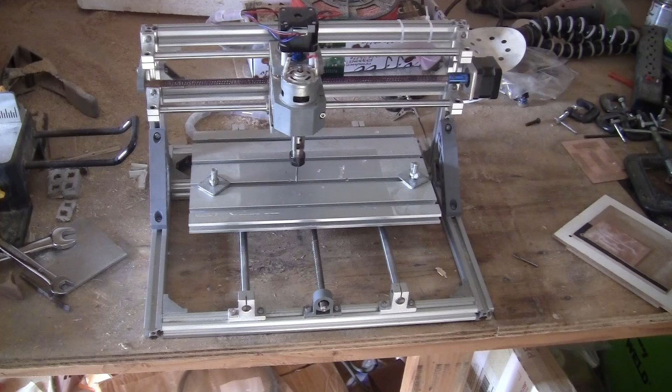Okay guys, so if you just bought one of these 3018 CNC machines, or you want to buy one and are not sure how to start milling with it, I'm going to make a simple step by step guide to show you how to start making something with this CNC machine.

So the first step is to install the driver for the control board of the machine. This machine is the Chinese knockoff of the Arduino chip, so you just need to search for CH340 driver, and click on the first link, CH340 drivers for Windows, Mac and Linux.

Click on it, go down, and download for Windows. Click on it, save, and open. Unzip this and click on install. Here you just click on install if you haven't installed it. I already did, so I'm going to skip this step.

Next step, what you need to do is install a software so you can communicate with the machine, talk to it, make it move, and start milling by sending the G code. So you type in Candle GRBL.

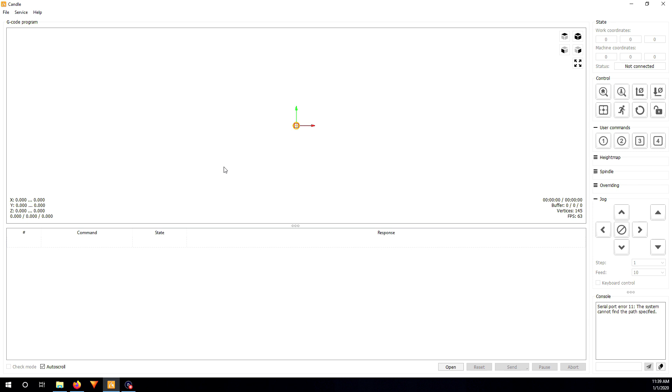Here's the interface of the software. Go to service settings and choose the port of the machine, so it's COM6, and click OK. As you can see here, it reads the GRBL version of the machine, and that's it. If you click on the dollar sign here in the comments, you should see all the parameters of the machine.

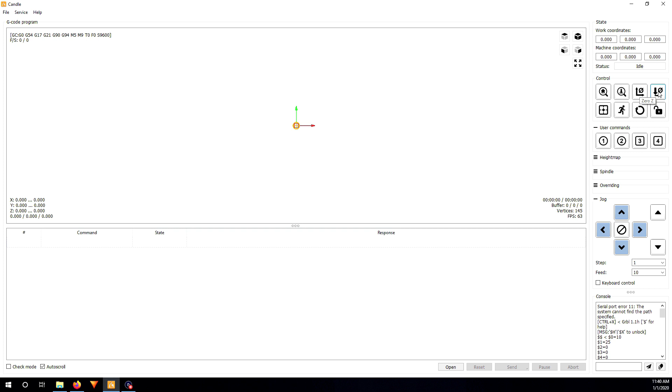So now what you can do here is use these buttons to move in X and Y, and these buttons to move in the Z axis. These are to zero in X and Y, and this is to zero in the Z axis.

Next step, you will need to create a G code file so the machine can use that and run and make something. So what I'm going to use here is the free version of Fusion 360.

So just type in Fusion 360 free, and here you can see there's a link for Fusion 360 for free personal use. Just click on that. In here you can sign in, create an account, and download the software and install it.

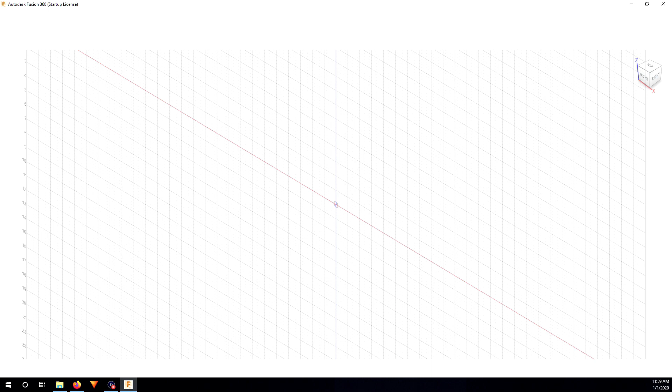I already did it, so I'm just going to go here and type in Fusion 360 to open it. Once you install Fusion 360, you just open it, sign in, and create a license. So here I have a startup license.

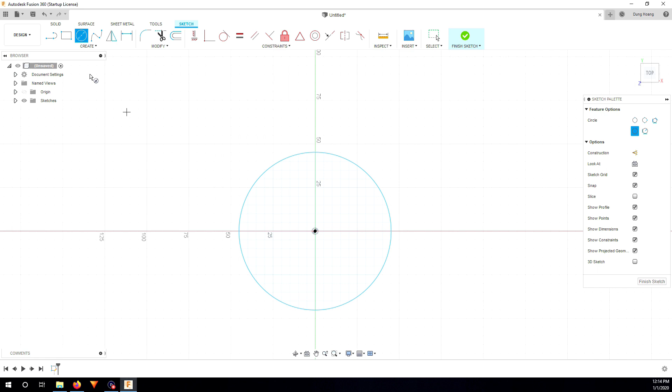So I click on Sketch to create a new sketch here, and I'm going to create something simple to show you the example. So I'm going to create a circle. For the size, I'll probably choose like 50 millimeters.

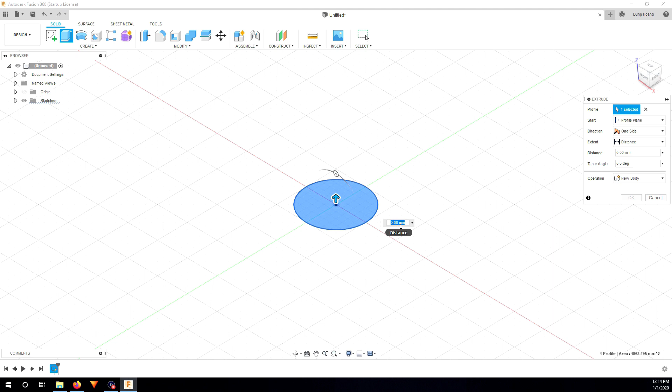Finish sketch, and go to extrude, and do about 12 millimeters, because I have a piece of plywood that's 12 millimeters thick, so that would be very easy to operate. So I create 12.

So here I'm going to round the edge. I click on fillet here and make the diameter 10, 12, or whatever - 10 is fine.

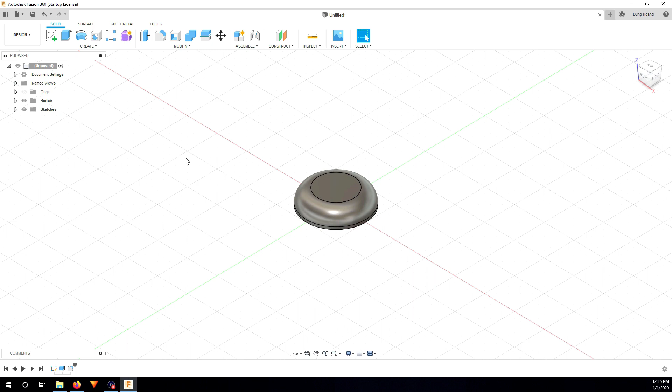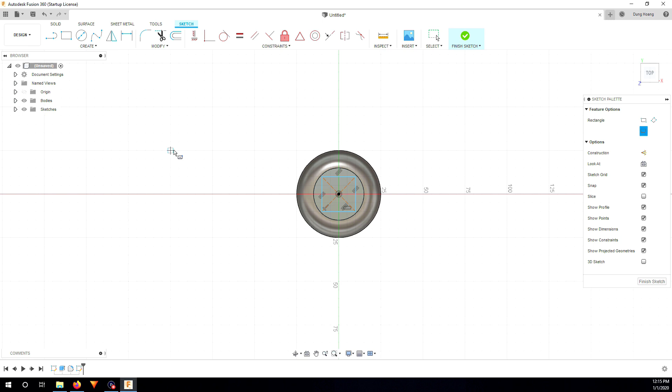And then what I'm going to do is create a square in the middle, just cut in, so just to show you the example. I click on this surface and draw a rectangle, but I'm going to do it from the center, so it will start here and make a rectangle probably like this, and I finish the sketch.

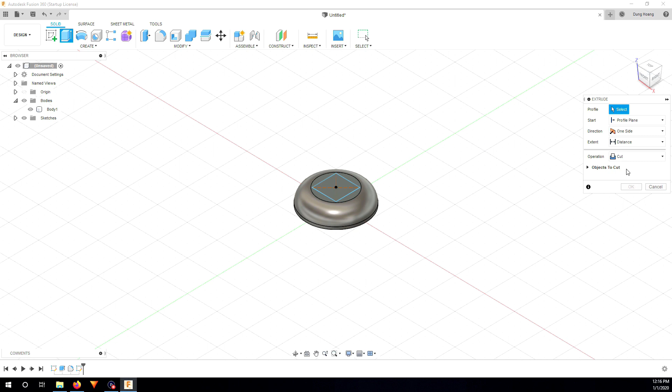Then, because I'm going to cut this profile into this body, I go to body and choose body 1, and go to extrude, and here I'm going to do a cut, and the object to cut will be this profile, and it should go down this way, and I'm going to do 5mm like this.

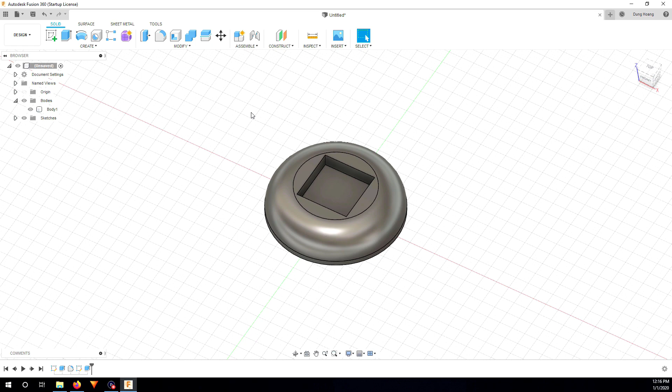And here I have a square in the middle, but as you can see, the corner is like 90 degrees, which I cannot do because the bit is round. I have a 3mm bit, so I'm going to fillet this a bit. I click on fillet here and choose all 4 corners.

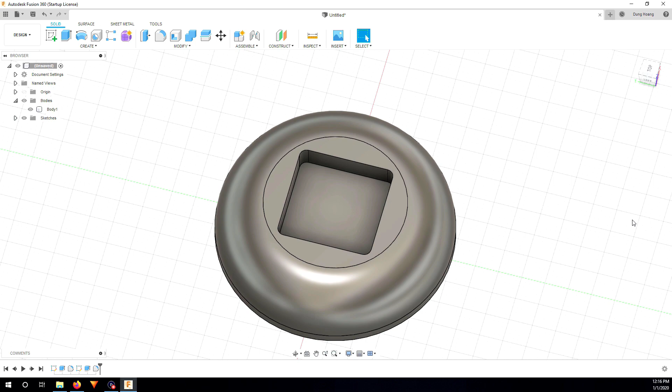And I'm going to put 1.5mm. Here you go, that's it. So now I have a very simple shape here. From here you can design anything you want, but I'm just going to make a simple example to show you quickly.

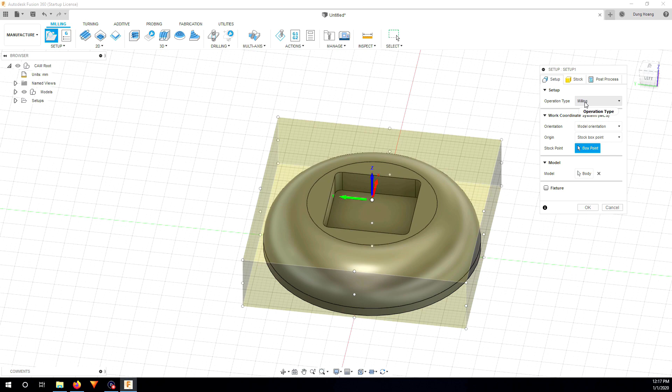Now to the CAM part, I just click on this button and go to manufacture, and click on setup. Here, operation type, just click on milling, and what I choose is the corner, and you can see here the arrow is X goes this way, Y goes this way, and Z goes this way. So I usually choose this corner to start, and for stock I'm going to put the offset on the side at 5mm.

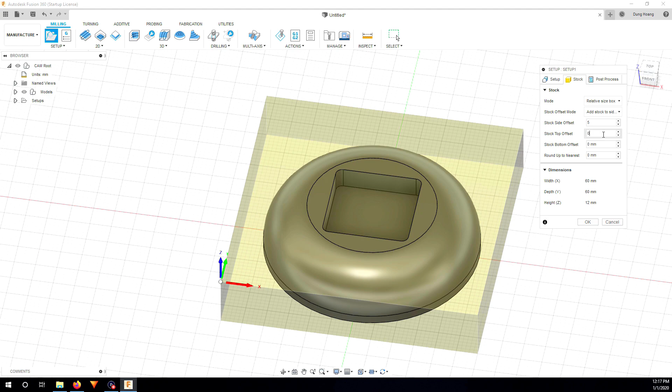And then top offset I put 0. So now I'm just going to do right on top here. So I click OK, that's it.

Next step, you have to create the tool. So you click on this tool library. This tool library, you just create the tool once, and it will save the tool in your account here. So next time if you reinstall the software, you still have your tool library online. So to create a tool, just click on this symbol.

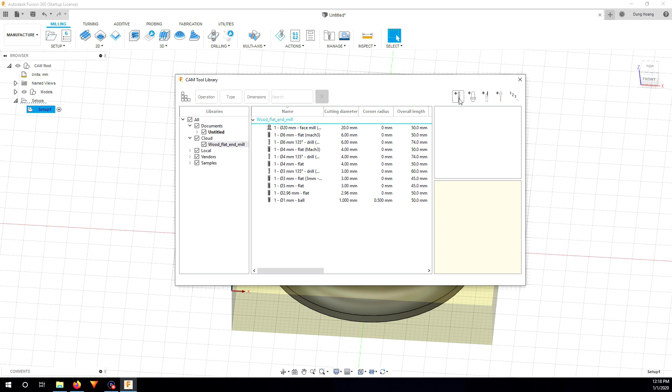Create a new tool here, and well, I usually like to make it run really fast for the spindle, so I put like 10,000 RPM. And cutting feed rate, I probably go a bit slow because this machine is not really powerful, 750mm per minute, that's fine. Lead in, lead out, ramp feed rate, I'm going to go with the recommended settings, so that will be fine.

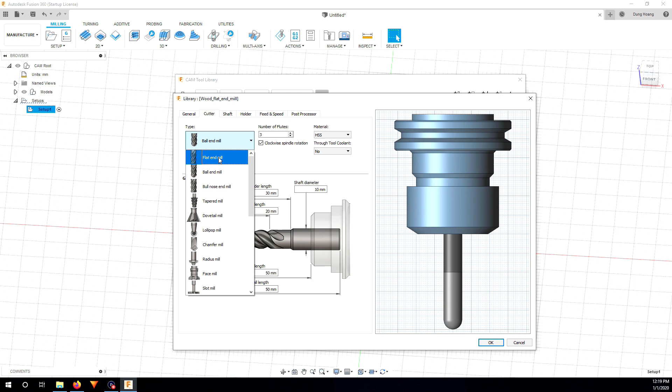Now for the cutter, well, you choose the type that you have. I have a flat end mill, so I'm going to choose flat end mill, and I have 2 flutes, in millimeters, that's what I use.

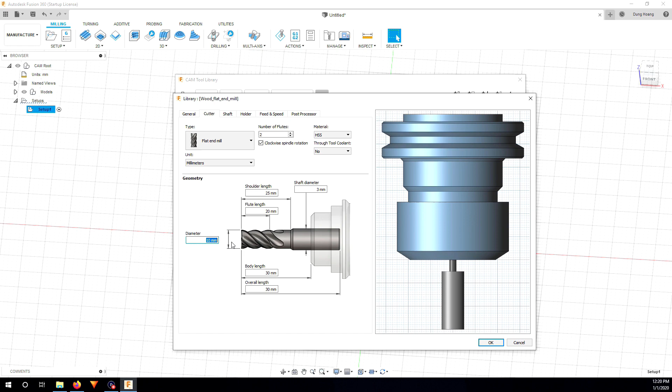So here you just enter all the parameters of your bit, whatever you buy. So I have overall length of about 50, body length probably let's say 30, and then I have shaft diameter only 3mm. Shoulder length, here you can put like 25, and here is 20. This is what I have on my bit, so here I put 3. Here you go, I'm done with this.

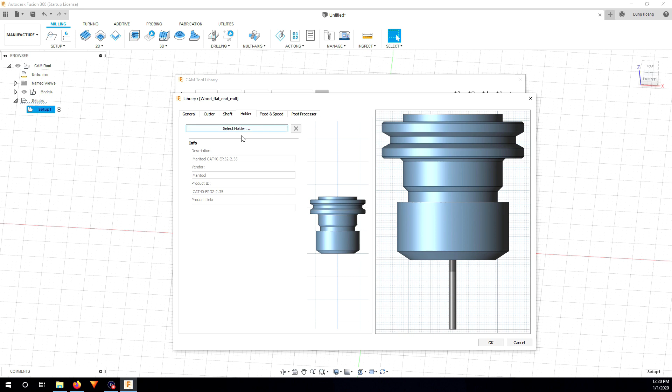General, you can put a name on this. You're going to put like 3 millimeter flat end mill, or anything. So what else? Shaft, I don't need shaft. So here I'm going to put holder.

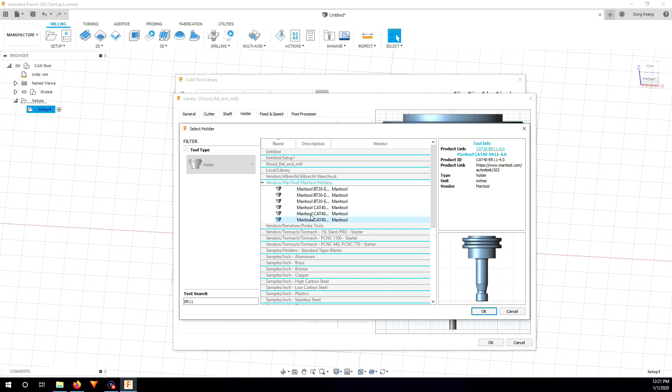So I have the ER11, and it's pretty short, I think. So I just choose like ER11, probably, well, whatever is similar to what you have. I think it's about like this.

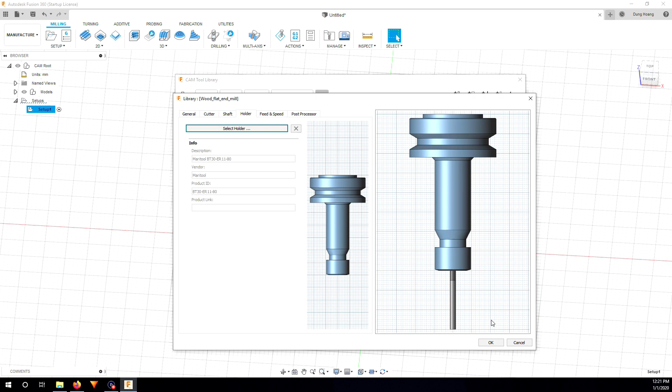So I just click OK. The holder shape doesn't really matter here in this machine because it only goes straight down and it doesn't have much space, so just the cutter by itself is fine. So you just click OK. So here you have the bit just created, so you can close it. Okay, so now you've created the tool.

First step, I'm just going to machine out this pocket. So I just go to 3D pocket clearing, and I choose the tool you just created. So here, and click OK. So here you have all the parameters of the tool, and you can change it here.

If you change it here, it only affects this cutting operation. It doesn't really affect the settings of the tool in the library. Next time if you open it, you still have the same parameters that you set earlier.

So here I just disable this, and I go to here, and I'm going to choose selection, and choose this boundary. Remember to choose this bottom boundary, not this one, because if you choose this one, it's not going to cut anything. So this one, and tool center is inside the boundary, and well, that's it for this.

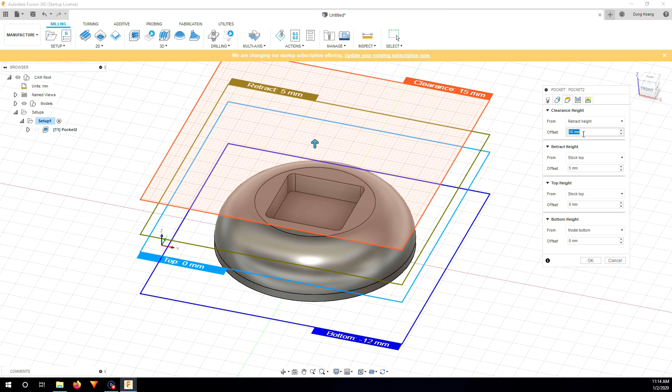And here I'm going to reduce this to 4, 2, and nothing here, because these are small numbers, since your machine doesn't have much range in the z-axis. And here I'm going to put like 0, and just reduce this number to whatever the machine is capable of. For me, 1 millimeter probably fine, so I just keep it at 1.

So I do 5 passes for this 5 millimeter thickness, and this I deactivate. You can leave some stock here and do one last pass to kind of smoothen the wall, but for me this is fine, so I just deactivate this.

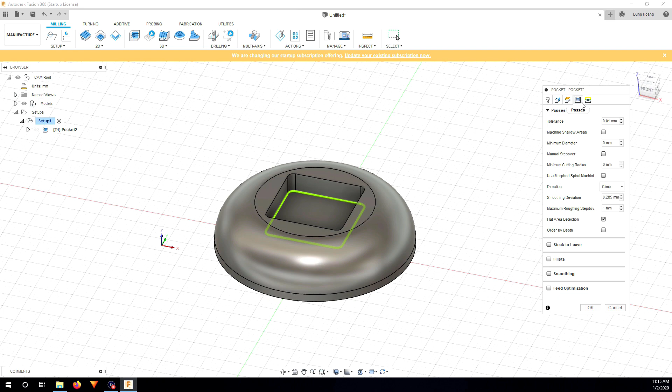And for this I'm going to choose the shortest path so it goes faster, and here I'm just going to increase the number a little bit, the angle for the ramp, so it goes a bit faster. And that's it, I just click OK.

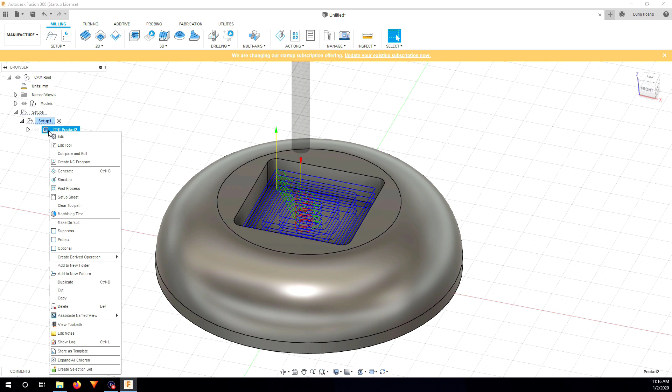Okay, so here the blue lines are the path that the bit is going to move. So you're going to cut along this blue line, and now you can just do the simulation to see how it looks. So just simulate, and here for tools, click on transparent so you can look through the tool. You can deactivate this, or you can choose to leave it, just to visualize it. So for stock, you want to see it, and you can also make it transparent or not. And here I definitely want to go a bit faster, so I can see how it cuts.

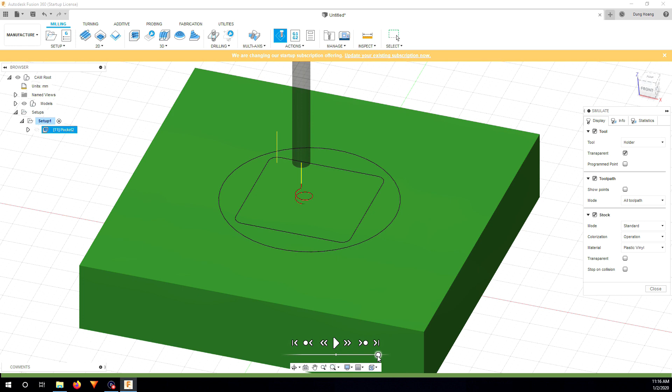Okay, so this looks correct to me. So I'll just close this and go to the next operation, just to mill out this fillet.

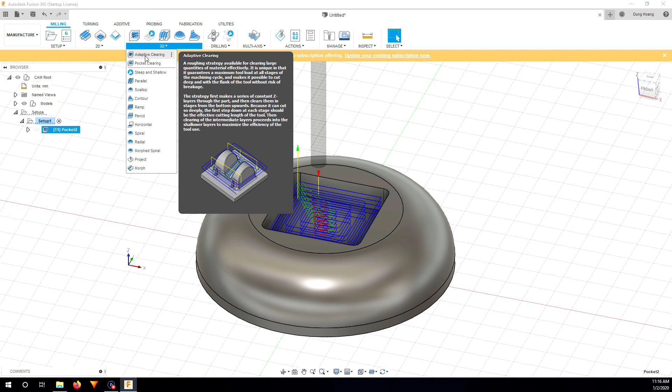So I'm going to do adaptive clearing in 3D. I'm just going to choose the same tool here, and I'm not going to change this, just to be quick. If you want to do multiple tools, this probably will cut smoother if you use a ball nose, but for me I just use flat end mills, just as one simple example to show you. If you want to do multiple tools, just watch my other videos, I showed how I did it. You can do it other way, but I think just the way I did it also works fine.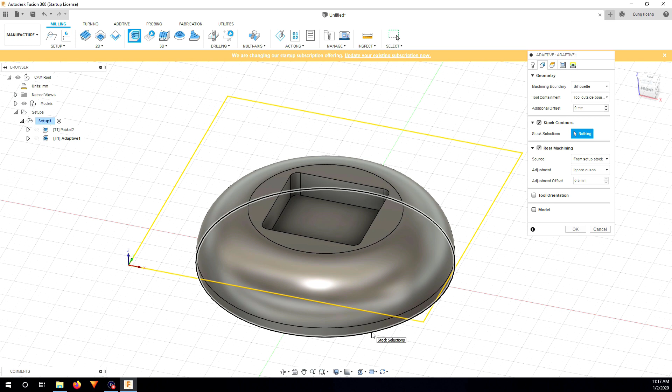So here I just go to machining boundary. I'm going to do silhouette. What this means is you're going to cut along the boundaries, just along this boundary of the piece. So tools will be, well, I can choose inside the boundary and additional offset.

If I leave it 0, it's not going to cut much. I'm just going to leave it 0 for now to show you an example. And I'm going to do rest machining, yes, from the previous operation. So it's not going to cut this part, it only cuts this part because this is already cut from the previous operation.

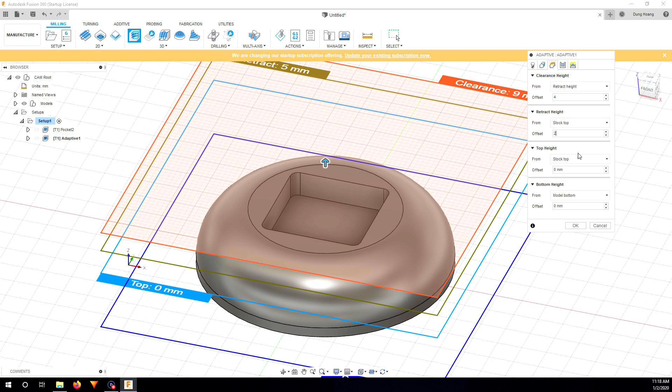So now I'm going to move to this, and I also reduce this to, no, 4, 2, and bottom height. I don't want to cut all the way down here, so I'm going to cut till here, so it's going to be like a 2mm offset. So the bottom height is like 10mm from the top here, so it will be exactly at this line.

Here I do the same, 0.1. Maximum roughing step down, this is very important, so reduce this to 1. And now fine step down. If you want to make it really fine, just follow along this curve, you reduce this. For me, I'm just going to increase this a little bit so it goes a bit faster, 0.2mm.

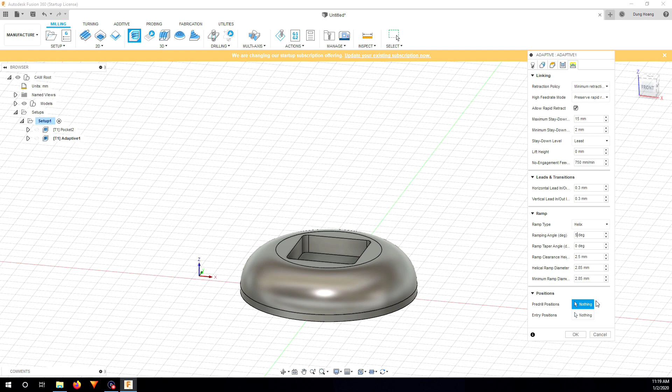Stock to leave, I'm going to just put 0 for now, so I uncheck this. Okay, here just shortest minimum retraction, same here. Ramping, I'm going to put like 5 degrees. And that's it, I'm going to click on OK.

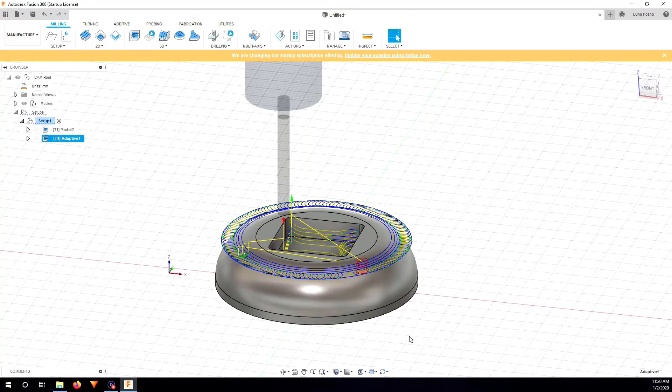Okay, so as you can see here, it only generates the first kind of step down. It doesn't go all the way down here because I didn't leave any additional offset, so the tool moves till here, so it's going to cut till this line. So it's kind of 0 on this boundary. So what I need to do is add some additional offset here.

I'm going to put like -6. Because if I don't leave enough additional offset, it's just not going to cut anything out here. Because the adaptive clearing kind of swirls like this, so it needs some space to do the spiral. So -6 is probably enough for the 3mm tool.

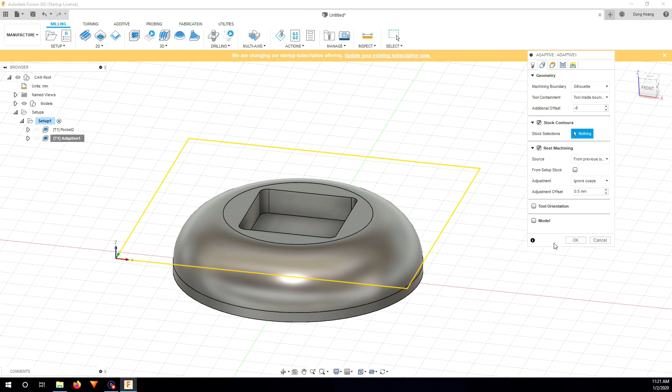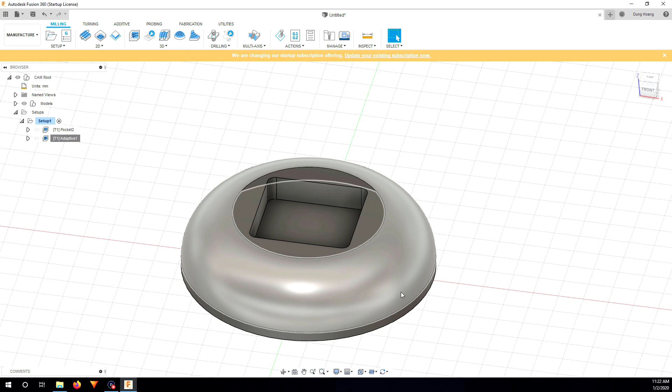Okay, so as you can see, this time is a lot better. It goes all the way down here, so that's what I want. So next step, I'm going to have to cut this piece out of the stock so I can break it off later. So I'm going to do 2D contour and use the same tool.

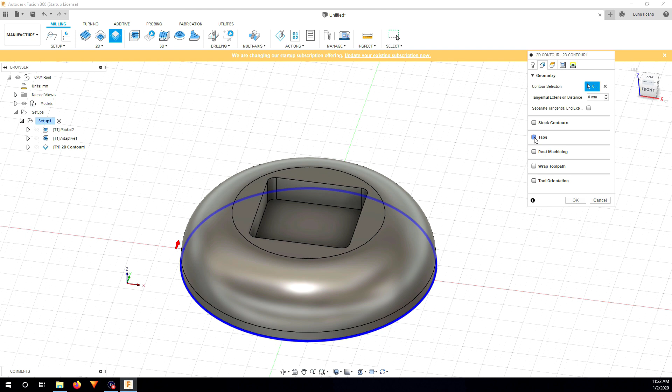And here, for contour selection, I'm going to choose the bottom contour. And I'm going to have to add some tabs. So tabs are those small pieces that just keep this piece staying in place, stuck to the stock, and you can also break them off very easily later.

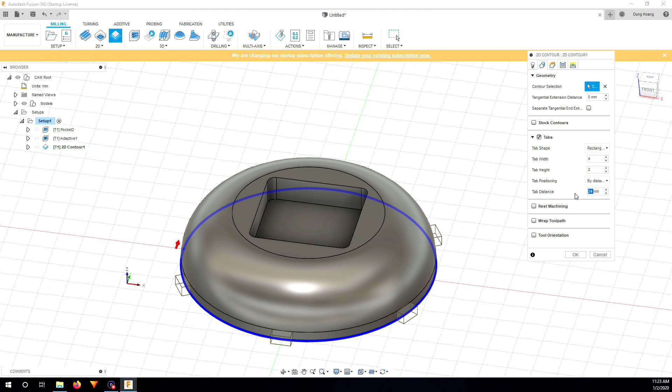So here I'm going to put like 4mm. Tab height will be like 2mm, just this kind of thickness. If you leave it too thin, it might just break off by itself. So depending on how many tabs you want, you can vary this distance. For me, I want about 4, so this will be fine.

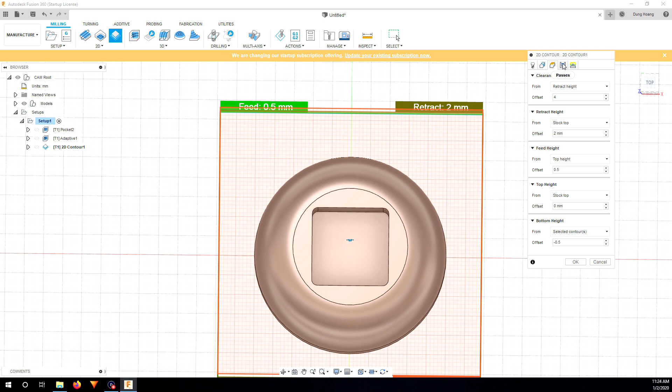So just leave 4 and go to the next step. I'm just going to put like 4, 2, 0.5, and here I want to cut it all the way down through the bottom of the piece, so I'm going to put minus 0.5 millimeter just to make sure it cuts all the way through.

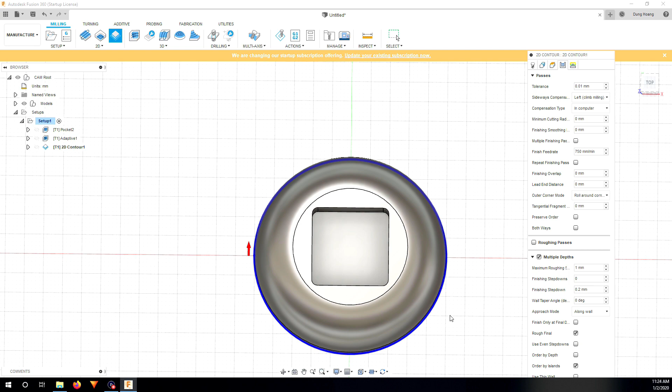Here I'm not going to need to change anything. Here multiple depth is probably important, because I don't want to cut more than 1 millimeter step down, so I'm going to put maximum roughing step down at 1 millimeter. So what this means is this thickness here, the leftover of 2 millimeters, it will do at least 2 passes.

And next step here, I don't think I need to change anything here. Oh, here I'm going to deactivate this lead in and lead out. I don't need it, and I click OK.

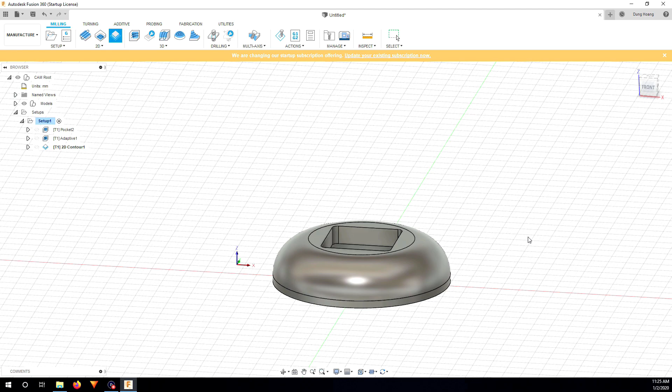So as you can see here, it goes multiple depths all the way from the top. It's actually not what I want, because this already cut.

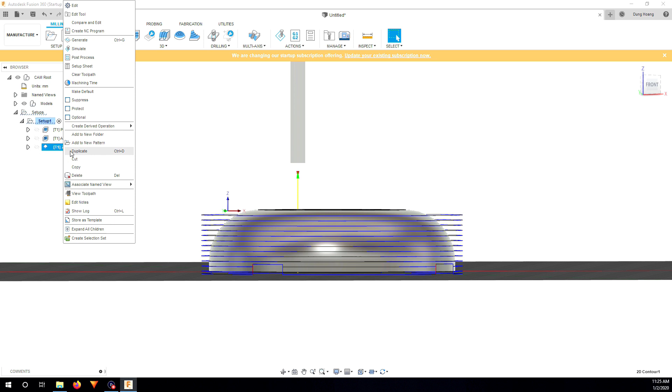So what I'm going to do is reduce it, cut only from here. I'm going to edit this. I think for top height here I can just put minus 10. So here is 12 millimeter, so minus 10 would be exactly this. So I click OK.

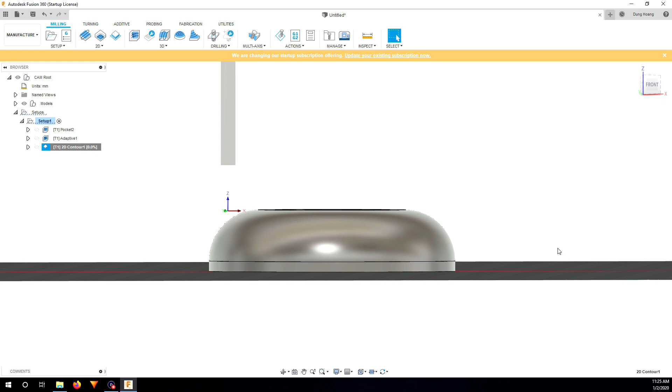So now as you can see here, it only does like 3 passes here. So that's also what I want.

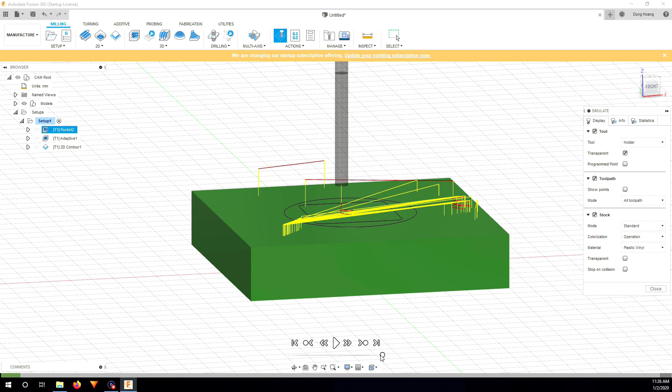So let's just simulate the whole thing and see how it works, and go fast. I'm going to deactivate the 2 paths here, so it's easier to view.

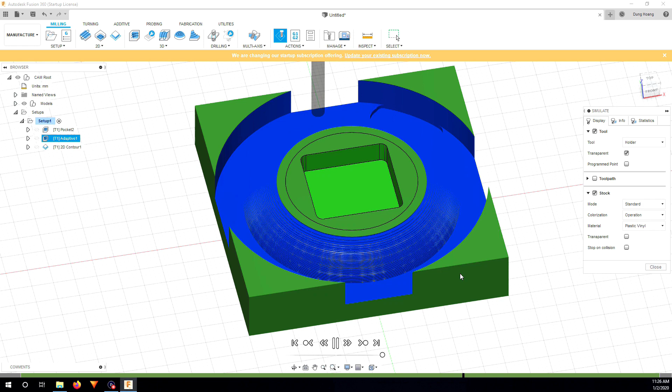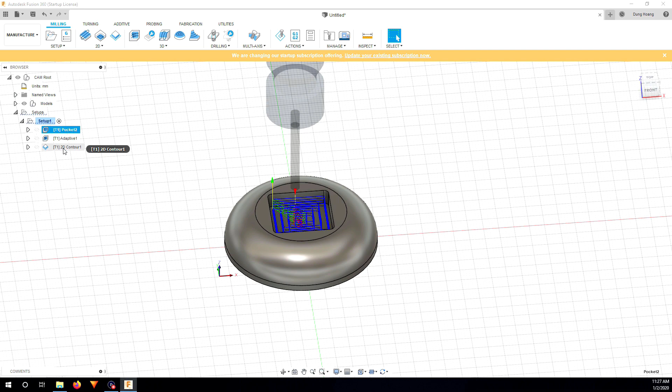Okay, so now everything looks kind of correct to me, so I just close. Here, because you only have one tool, you can just right click on the setup and do post process. If not, if you have multiple tools, you have to save these toolpaths separately. You can check my other video, I show more details there. Here I'm just going to click on the setup and do post process.

Okay, so now in here, what you'll need to do for the first time is choose what type of post processor you're going to use. For me here, I'm going to choose Grbl/grbl. That's the type of firmware, the control board used to control the machine.

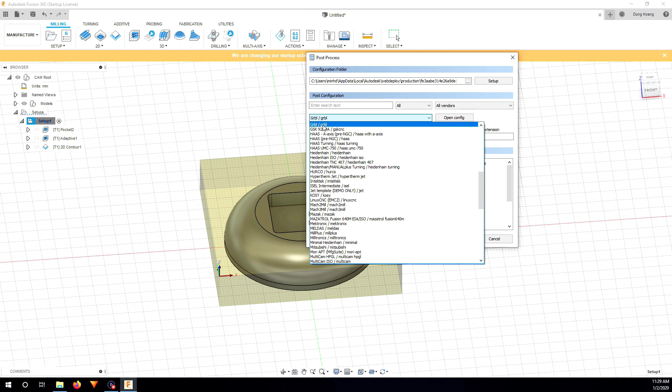So you click on post. Here I'm just going to name it the circular example piece. Yeah, that's it. So you just save it.

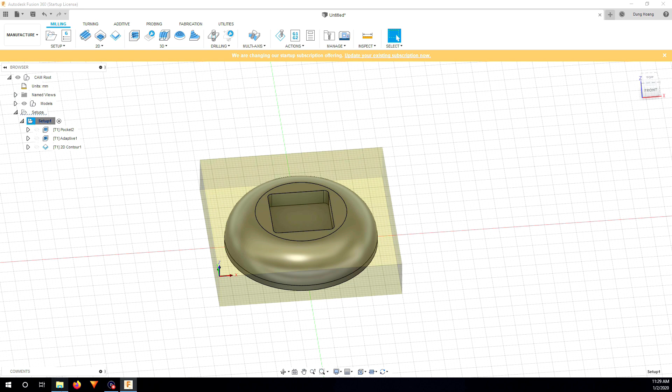Okay, so now when you save it, you can just go and run the machine. But I have to show you something that I think is important. So you go to the location of the NC file that you saved.

You double click on it, open it with Notepad or some text editor. So one line that you'll need to remove is this one, G28, G91, Z0. If you don't remove it, the machine will plunge into your piece and cut it before you actually start cutting. So that's not good. So I'm going to remove this and save it.

That's it. Okay, so now before starting cutting, first of all, just make sure you have the machine clamped down to the table. Because of the vibration, it might move and fall off the table, so you don't want that. And also make sure that your tool is really secured.

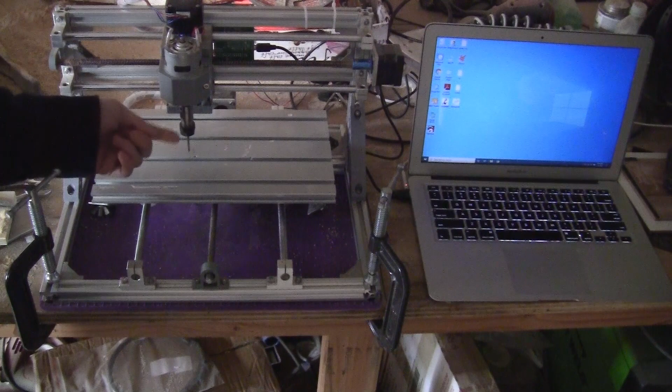Don't try to just secure it by hand, use the wrench. So just make sure that it's really tight.

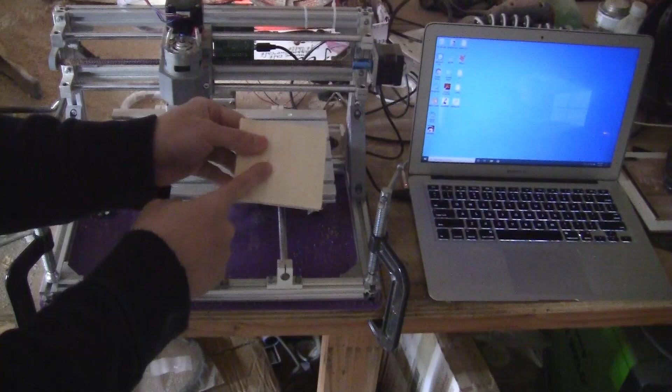Okay, and then next step, you have to fix the stock on it. For the stock size, you only need it to be bigger than what you're going to cut. So to fix this on this platform, you can use this type of bolt and nuts. It comes with the machine, but I don't really like this one because it takes some space here, and it's kind of hard to fix it down correctly.

So what I'm going to use is this type of mounting tape. I just need to cut like 4 small pieces and stick it at each corner and press it down to the platform.

Okay, once you press it down, just make sure it's tight. So the next step is you'll have to open Candle on that computer and find the 0, 0, and 0 point on this.

Well, you don't need to be exact at the corner here, as long as the Z axis is really touching the surface. So just go very slowly on the Z and go down slowly till it's at the surface.

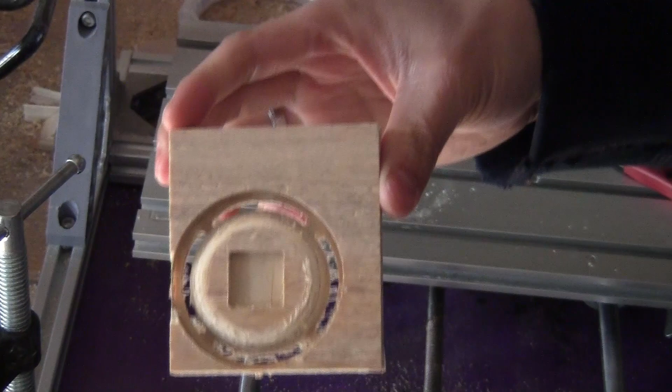So it looked like this. It's kind of exactly what you simulated on Fusion 360. You just need to break off these 4 tabs and then sand it a bit, clean it up, make it look nicer. But this kind of does exactly what it does on Fusion 360.

So that's how you start milling with this machine. And whatever type of tool path you want to use, just do some practice, make sure that you simulate it, make sure that it looks correct on the simulation first before you actually do the cutting.